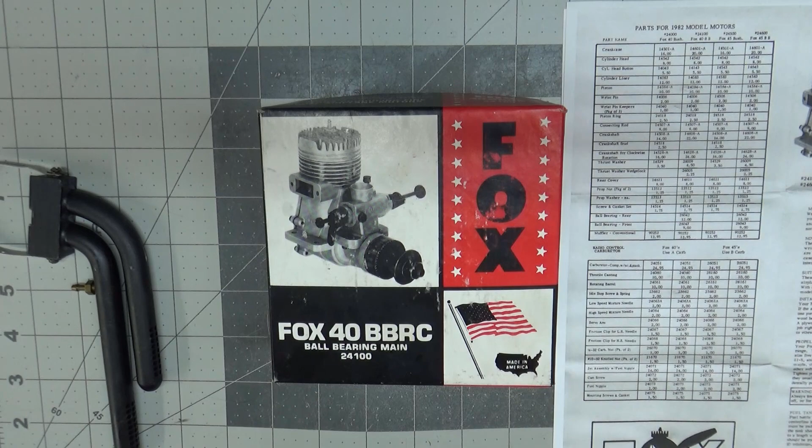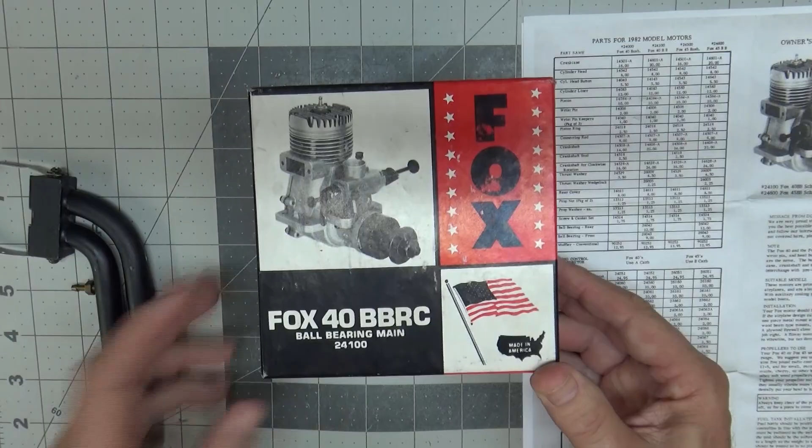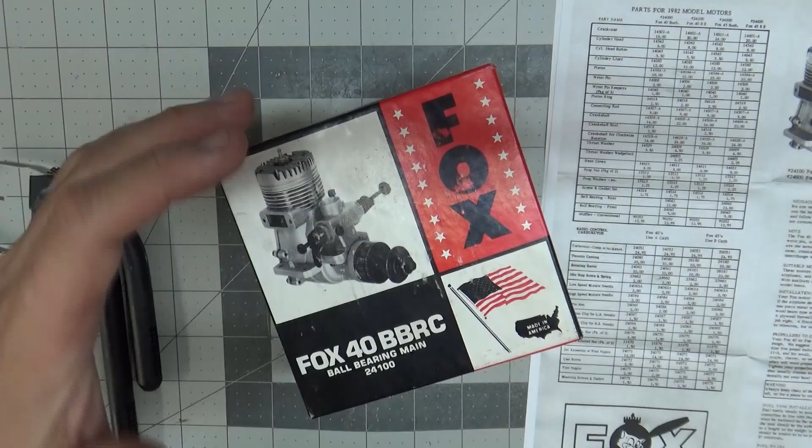This is the Fox engine. Now this is perhaps a Fox engine that many of you have not seen before. You've all probably heard of a Fox 40, but this Fox 40 is a BBRC, much like the other ones that came after this one, but this is actually part number 24100. And you can see, if you're familiar with Fox engines, it has a different style box than later ones where it opened up with multiple openings and a lot of foam in there. But this one says Fox 40 BBRC equipped with the Fox Mark 10 carb.

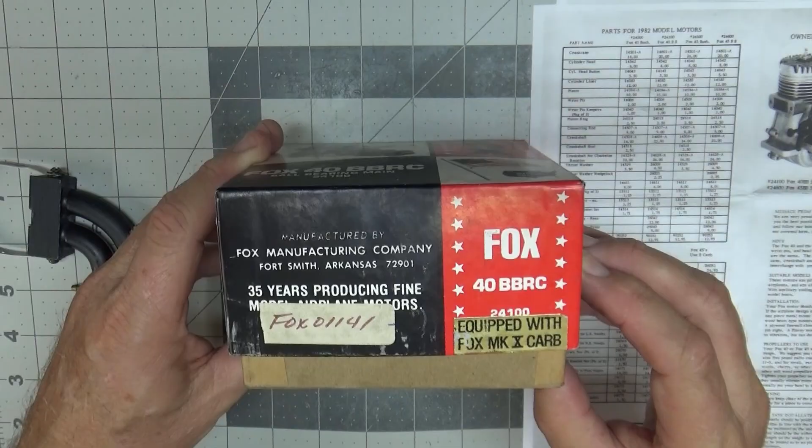Now I'll get into talking about the Mark 10 carb a little bit more, but let me just show you all sides of this box for those that are real aficionados of Fox. This, and of course this one's written upside down on this side, and they just keep doing that. So this is actually a 1982 version Fox 40.

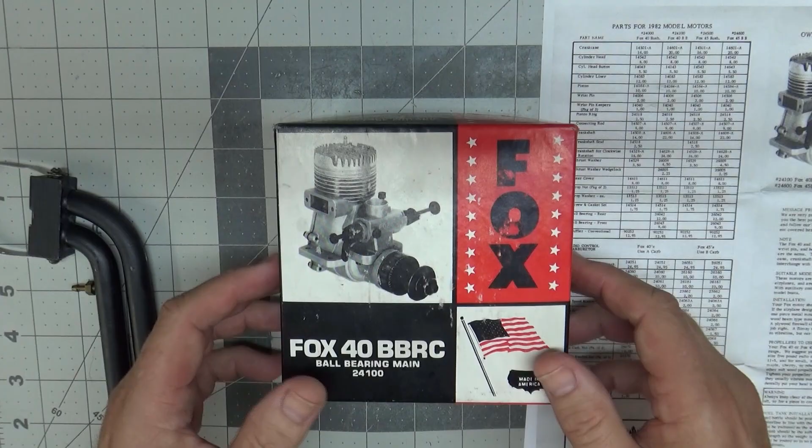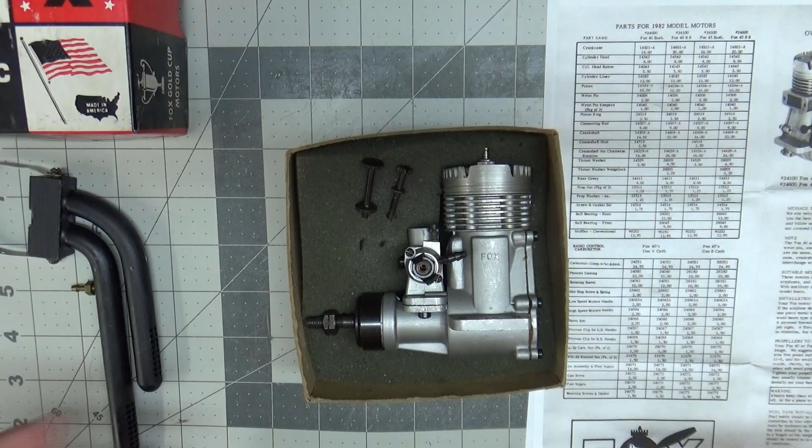And this particular one I got from eBay, I think I paid $50 for this, and it said it was a used engine. And if it's used, it's very lightly used. This is exactly how it came to me. It came with a Fox RC long glow plug or idle bar plug installed. It was a little tight, and I have put a little bit of 3-in-1 oil in it and on it, and it feels like this carb is tightened up again too.

So I've heated it up to try and get it loosened up. But neither the high speed nor the low speed needle are installed, so they're both in here, and they both look different. But this is all that came with it. There were no instructions or anything.

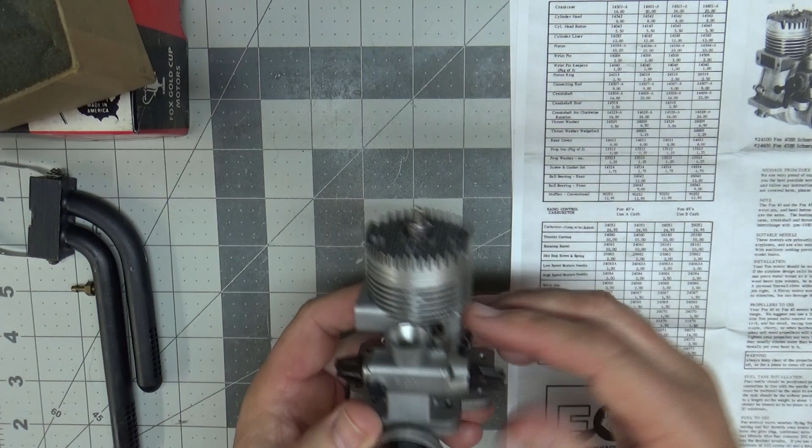Fortunately for me, MECOA actually has some pretty decent information covering this engine, and I was able to print out the actual PDF for this engine, and I'm showing you bits and pieces of it here, and I'll put a link in the description of the video. But the one thing about this engine is it's a 1982 vintage engine. I could not find the normal review article on this exact engine at all. There are several on the Fox 40 BBRC, but they're not this exact model.

Now the one thing about this particular model is, as you can see from the box, it wasn't cut out and it didn't come provided with an exhaust. So I didn't realize that this was going to be almost impossible to get an exhaust for at the time I bought it. Otherwise I might have thought twice about doing it.

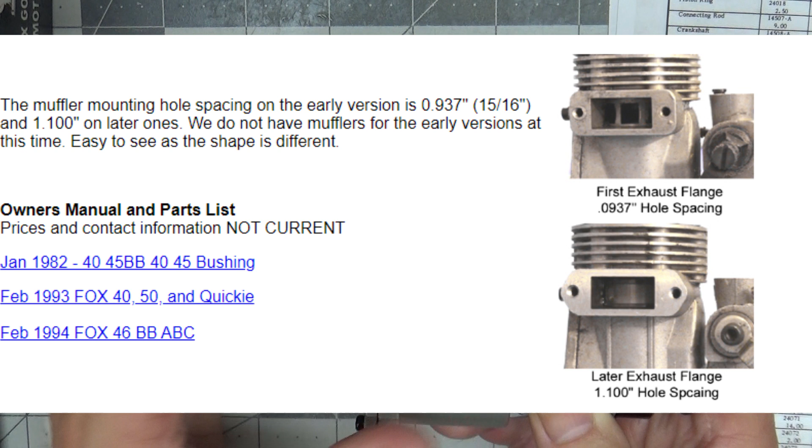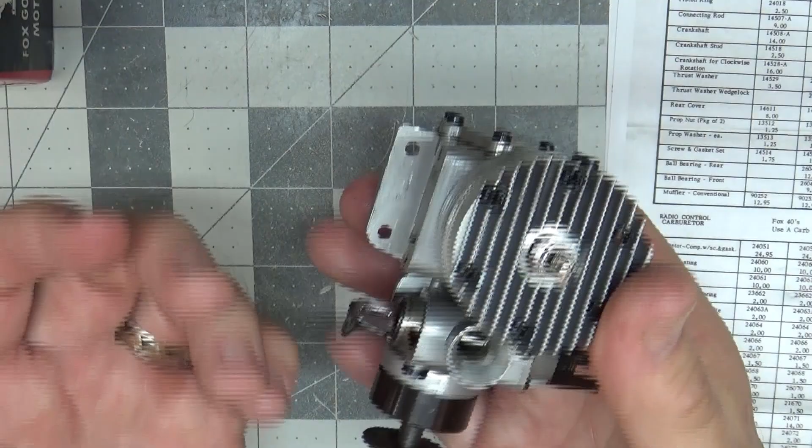Because I've got an image I'll put on the screen here, let me zoom in just a little bit more here. You can see the shape of this exhaust port, and the MECOA site actually has, this is where I got this image from, they have a really good image there showing and explaining that this is a very different size, the spacing and the shape, different size exhaust opening than all later model Fox engines of this displacement size, the 40, 45, 46, 50. So those exhausts will not fit on this engine at all.

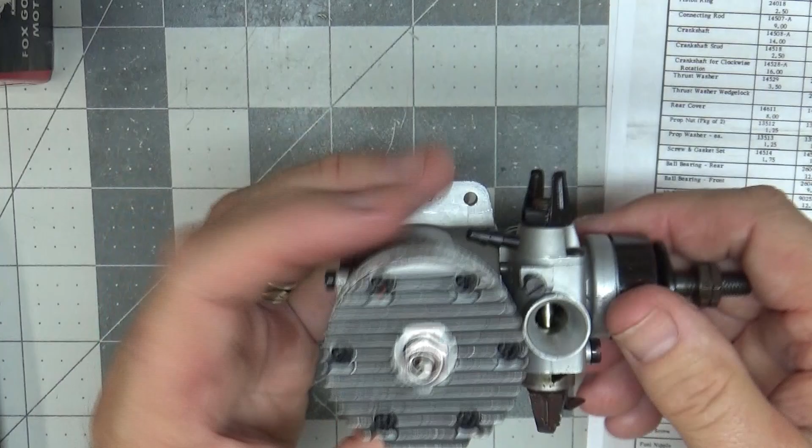So I was like, holy crap, I got this engine. I don't want to run it open exhaust. Let me just keep rotating it so you can kind of take a look at it. I don't want to run it open exhaust. That would suck. But anyway, this engine, I don't see any screw mounting lugs.

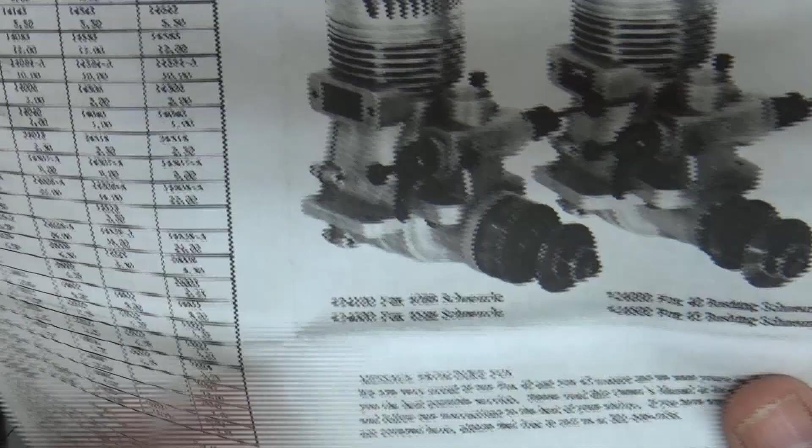So if this was run, it said used. I'm not sure if the person that sold it really knew. I don't remember exactly what the ad said because it's been several months. But I don't see indications that there's been screws or that this has been mounted. If it was run, maybe it was simply run on a test stand, or maybe when they said used and they felt it was gummy, it was because it had been run at the factory, because back in this time, 1980s, early 80s, I believe Fox was still running all of their engines prior to shipping them.

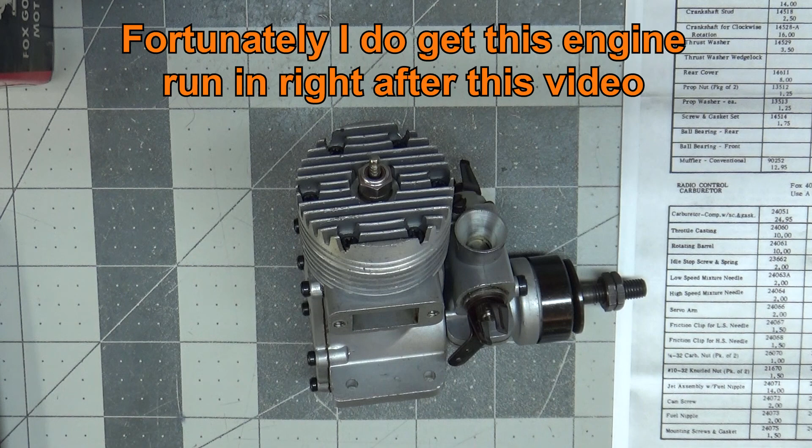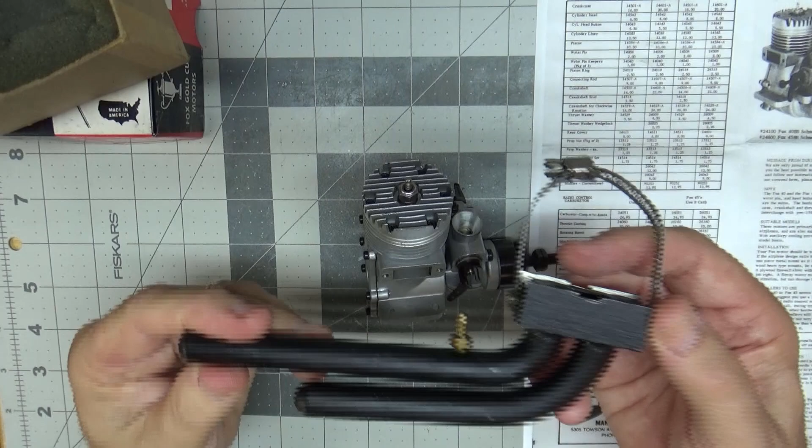So that could have been all it was. Now if you look here real close, you don't see a piston ring. And you won't, because this isn't a ringed engine. Now here in this image it shows the one I've got here, 24100 Fox 40 BB Schneurle, and then they have the bushing version, which obviously mine's the ball bearing version, but this doesn't mention anything about the construction. So knowing that most other Foxes were steel sleeve and iron piston, I am left to assume that this is a cast iron piston and steel sleeved engine.

Now the only way I would know for sure is if I took the head off and put a magnet on the head or on the piston. But you know, in all honesty, I don't really want to go and do a look inside on this engine. I really want to just kind of get it on the stand and run it.

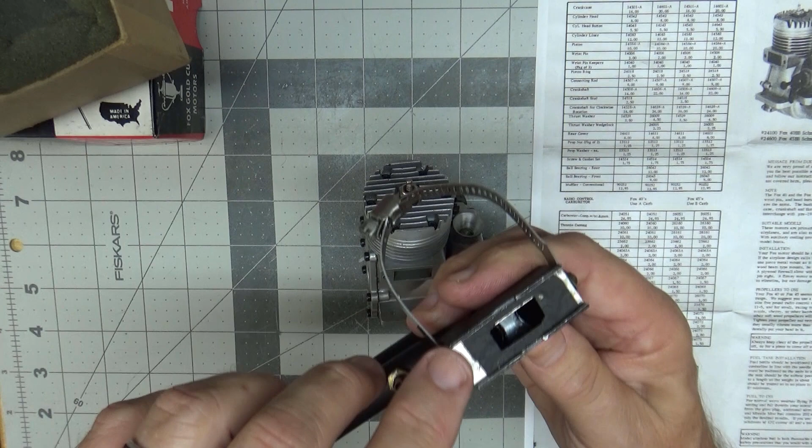I'm not entirely sure that's going to happen this weekend because we're dealing with an impending tropical storm, possibly a hurricane. Also, just because of the weather pattern, we've got a bunch of showers coming in from the Gulf of Mexico periodically, so it's pretty nasty and wet outside. Trying to time an engine run between showers might be a little tough.

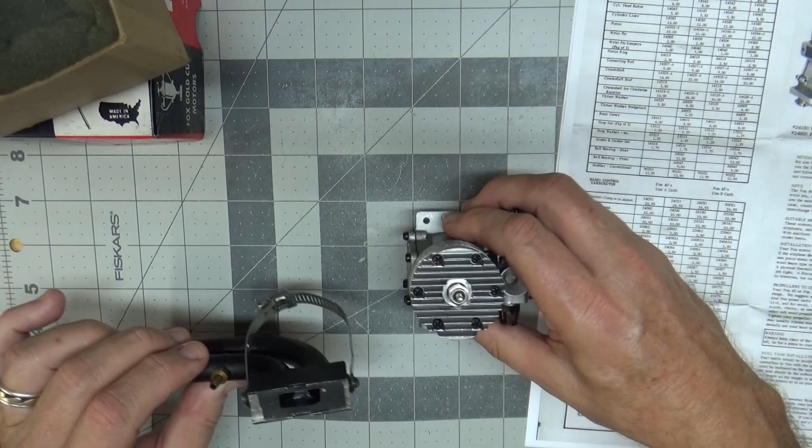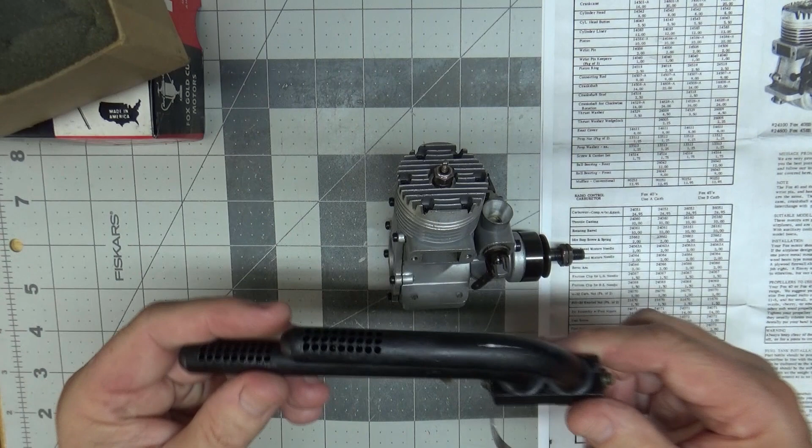Going back to the exhaust thing, I was like, holy shit, this sucks, I don't have an exhaust for it. Luckily I do have something that will fit, you can see it here. This is an exhaust I bought several years ago on eBay because I thought it was cool. I'd had one of these back in the early 90s that I put on some engines, and I remember flying them on my Eagle 2 trainer plane. I bought this one because I thought it looked cool as hell, and it's still a neat looking little exhaust.

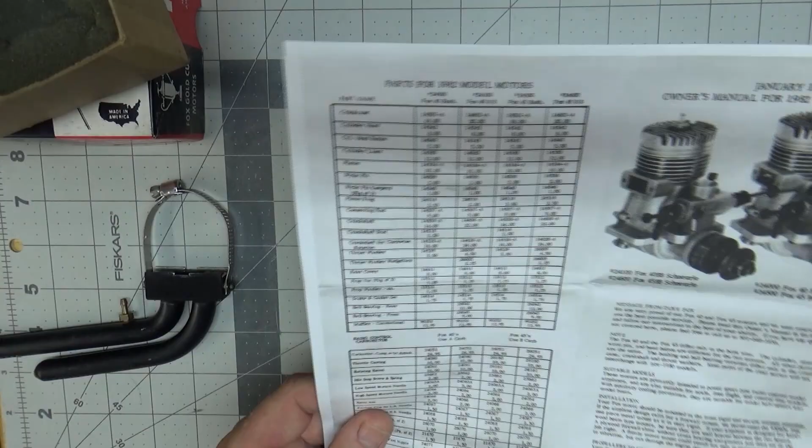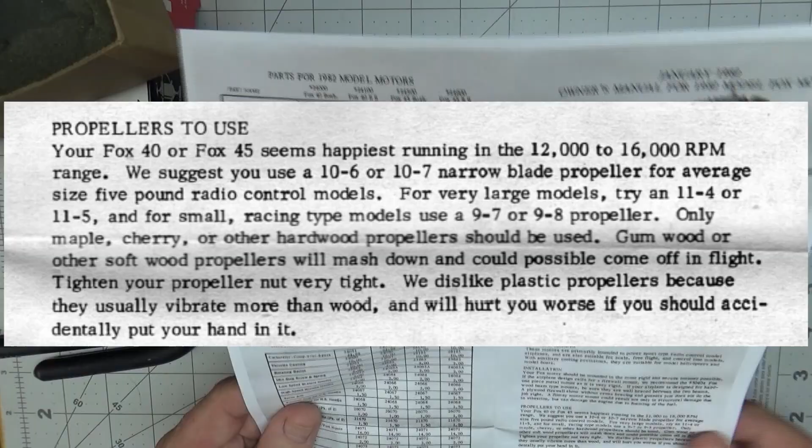The thing is, and I had already fitted this on the engine a month or two ago, this opening here was too large. So I had some gasket material, and I had to cut it and position it properly so it will kind of work. When I run this engine, I'm going to be running it with this on here. I'll have to make sure I position it properly, because I could slide it one way or the other and offset it. So it's going to get run with this exhaust because that's all I've got.

I have not been able to find the actual exhaust for this, and I really don't think I ever will. They're just that rare. This exhaust has no baffles, so it's going to be loud, might as well be an open exhaust. But at least it might look cool with the exhaust smoke coming out of there.

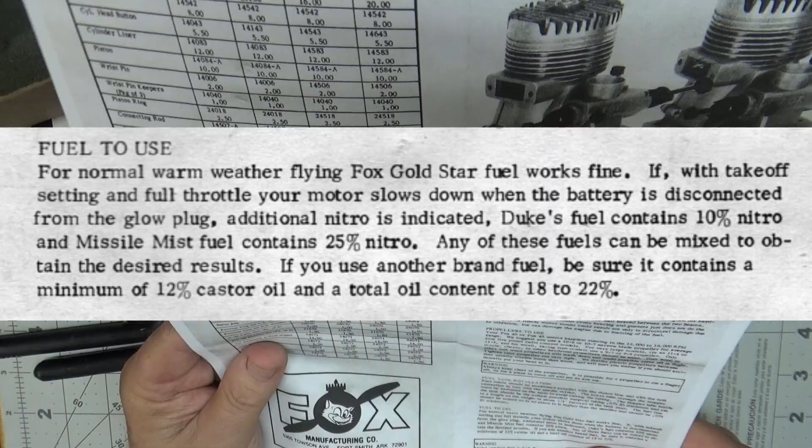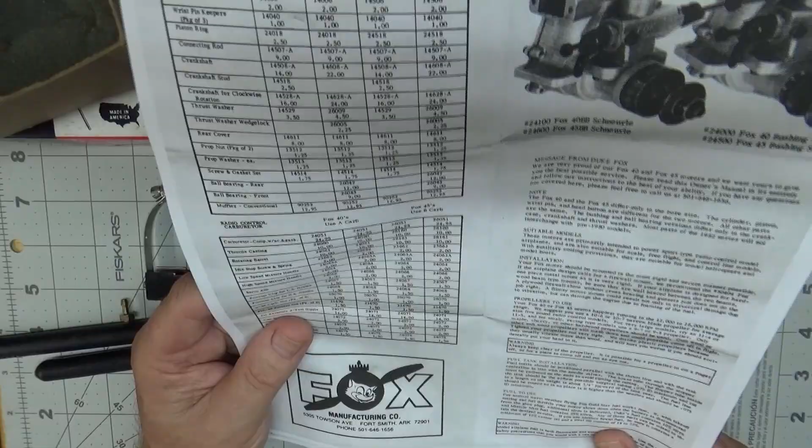But I want to read some of the stuff from this instruction manual here, because this is how I'm going to run it. I'm going to run it exactly like they say here, exactly as it would have been run back in 1982.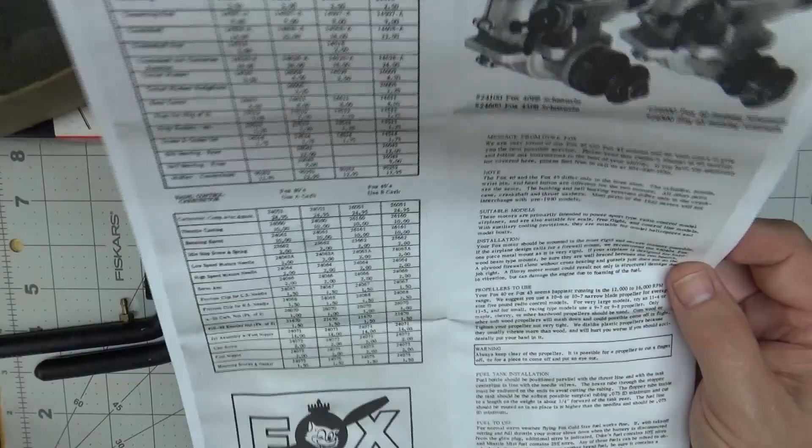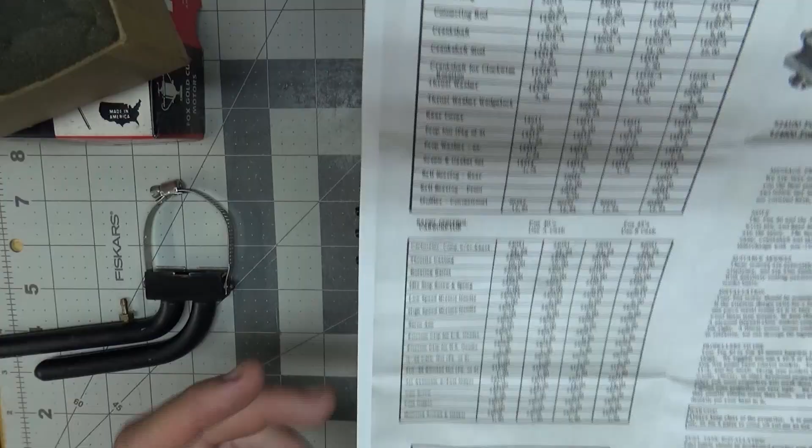So here it says, propellers to use: your Fox 40 or 45 seems happiest running in the 12,000 to 16,000 RPM range. We suggest you use a 10.6 or a 10.7 narrow blade prop. So that's what I'll use, a 10.6 APC prop.

Fuel to use: for normal warm weather flying, Fox Gold Cup fuel works fine. I have no idea what that is. Let's see here, Duke's fuel contains 10% nitro and Missile Mist fuel contains 25% nitro. Any of these fuels can be mixed to obtain the desired results. If you use another brand of fuel, be sure it contains a minimum of 12% castor oil and a total oil content of 18 to 22%.

Now I think I've got some 18 to 22% oil fuel. I'm not exactly sure what the castor percentage is or what the nitro content is off the top of my head, I'd have to go dig in there and see, but that's probably what I'll use. I'm not going to be too concerned about doing one run with fuel that doesn't have the exact amount of castor. And if it is a concern, I'll just add a little bit of castor to my fuel tank when I run it.

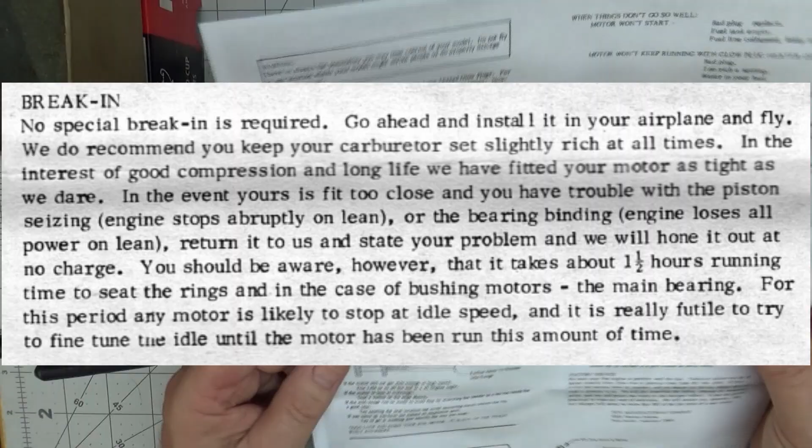What was the other thing I wanted to show you here? This is also, I was wondering about break-in, because I don't know, maybe this was run once at the factory. The thing is, if they ran them at the factory in the later days when the needle valves would stay on here, their instructions would say this was run at the factory, so all the settings are preset, and all you should have to do is put it in your plane and fly with minor adjustments. Well, as you can see here, this thing wouldn't fit in the box with those needles installed, so they're taken out. I'll get to that also.

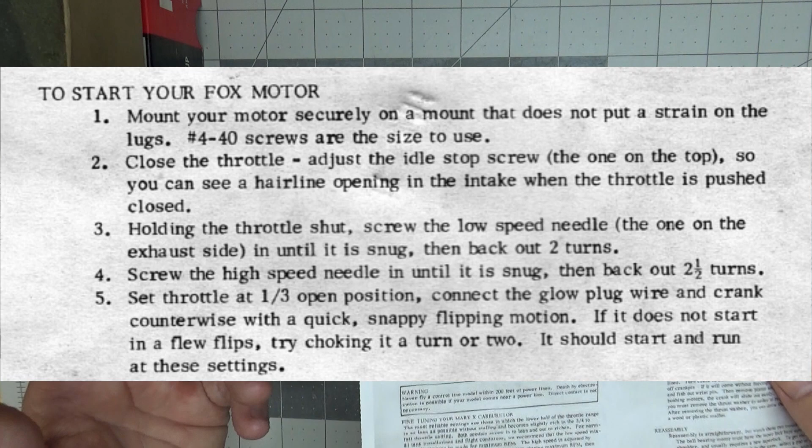Break-in: no special break-in is required, go ahead and install it in your airplane and fly. We do recommend you keep your carburetor set slightly rich at all times in the interest of good compression and long life. In the interest of good compression and long life, we have fitted your motor as tight as we dare, which tells me this is a lapped iron piston sleeve. In the event your fit is too close, you'll have trouble with the piston seizing, engine stops abruptly, blah blah blah, whatever. You should be aware, however, that it takes about an hour and a half of running time to seat the rings - which this doesn't have rings - and in the case of bushing motors, the main bearing. So why they would say rings there, I'm not sure, unless they actually made a ringed version of this, at the 45, because this one clearly doesn't have a ring.

So anyway, fine tuning, let's see here. They actually tell you how to set your screws. Okay, here you go: start your Fox motor.

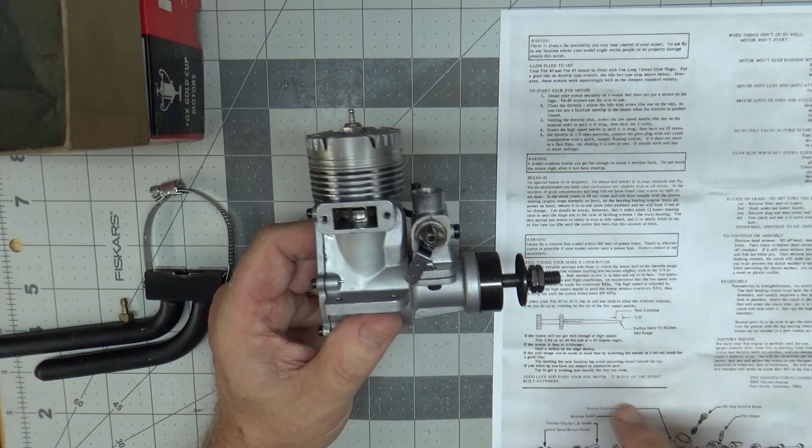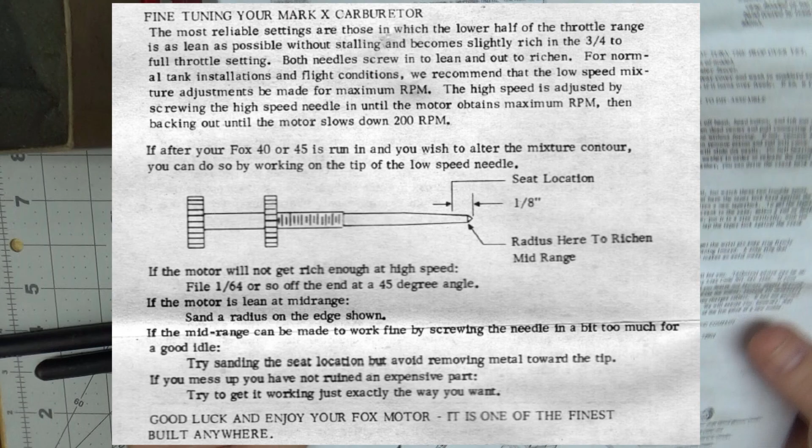Close the throttle, adjust the idle stop screw, the one on top, so you can see a hairline opening in the intake when the throttle is pushed closed. Holding the throttle shut, screw the low-speed needle, on the exhaust side, in until it is snug, then back out two turns. Screw the high-speed needle in until snug, then back out two and a half turns. Set the throttle at 1/3 open.

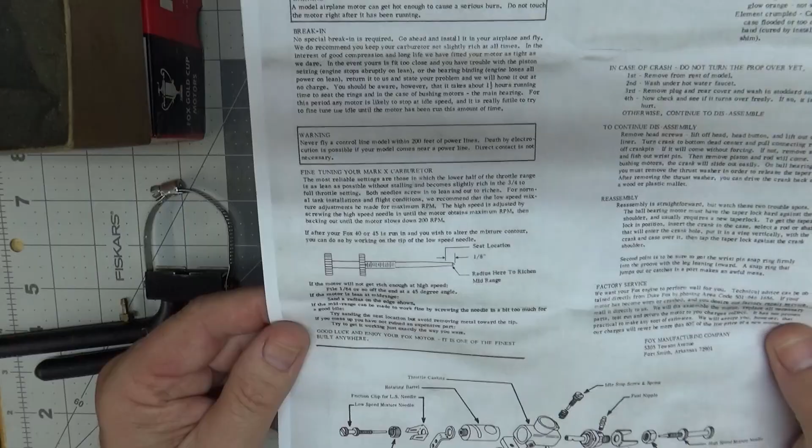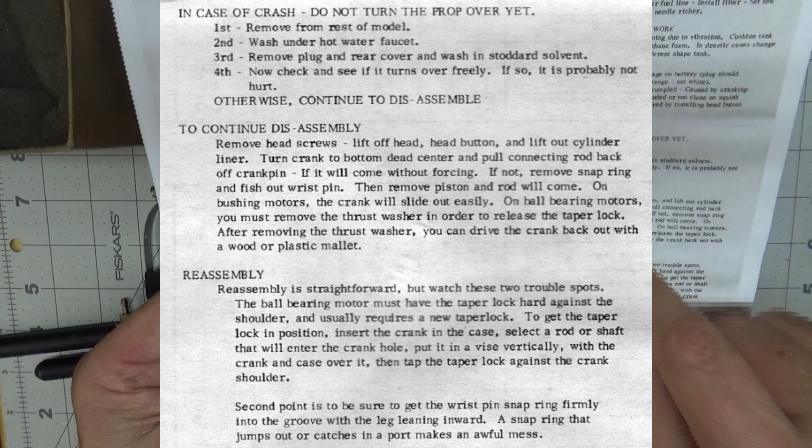So they're telling you the factory recommended initial settings for both the high and low-speed needles, which is good because a lot of people ask that. More modern engines don't specify that, because they're not that type of needle — it's an inset low-speed needle that's already preset, and they don't normally give you that information.

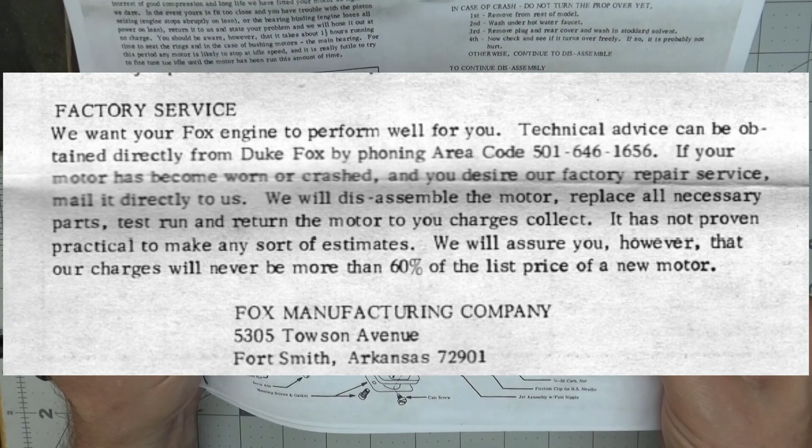Now here's where things get really interesting, and this is what always intrigued me about Fox engines. Back when Fox was an active company, they'd actually tell you to go ahead and disassemble your engine, or modify the high-speed and low-speed needle if you want. They've got a diagram saying that if after your Fox 40 or 45 is run in you wish to alter the mixture contour, you can do so by working on the tip of the low-speed needle — they're saying you can file or change the profile of these needles. Where else would a manufacturer ever say it's okay to change what they provided you?

Here they also talk about disassembly in case you crash it and have to take it apart. Their factory service statement is interesting too: 'We want your Fox engine to perform well for you. Technical advice can be obtained directly from Duke Fox by phoning area code...' If your motor has become worn or crashed and you want our factory repair service, mail it directly to us. We will disassemble the motor, replace all necessary parts, test run, and return it to you. Charges collect — it has not proven practical to make any sort of estimate.

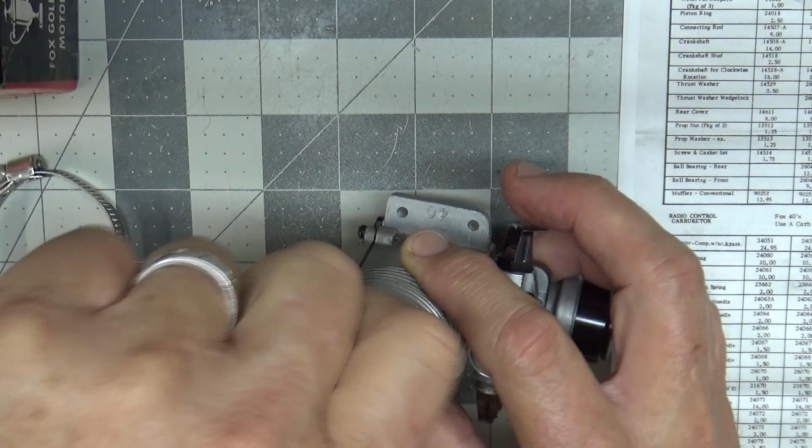So anyway, this was a full-service company back then. First they say it's okay if you disassemble the engine, and if you screw it up you can send it back to them and they'll fix it. They also say you can alter the profiles of the high-speed needles. It was an interesting time in modeling history.

So it's going to be interesting. I'm hoping to get this engine on the stand very soon, maybe this four-day weekend. When I'm done here, I'm probably going to install those needles as they said, put the exhaust on, get a prop on it, and mount it to the stand so it's ready to go if the weather's okay and I can run it real quick.

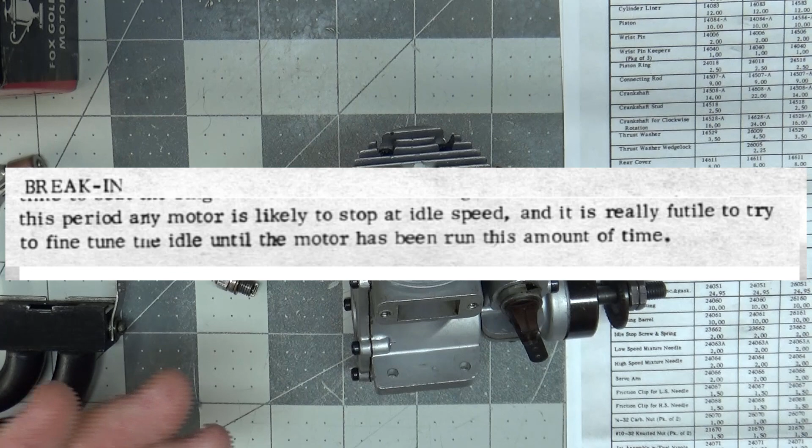This has probably been a pretty long video, a look at a 1982 Fox 40 BBRC engine that in my mind looks like it's probably pretty new. I didn't take the head off — I didn't really want to — but I think the plug is loose, and you probably won't see any carbon on top of the piston if we can even get an angle to see it. There you go, you can kind of look in there. So in my mind, I think this is a new engine.

Will I run it rich? Yes, I'll run it a little bit rich. Let's see, does it say anything about RPM during break-in? Let's check the fine-tuning section for the Mark 10 carb... no, it doesn't really say anything, just run it slightly rich.

So I'll probably peak it out, see what it wants to peak at, then back it off and run it like that. The instructions also said don't even expect to get it to idle well until it's been fully broken in. But of course, me being me, I'll try to see if I can get a decent idle on it anyway, since I don't know how many times I'll be running this engine.

But anyway, that has been a look at a 1982 Fox 40 BBRC engine.